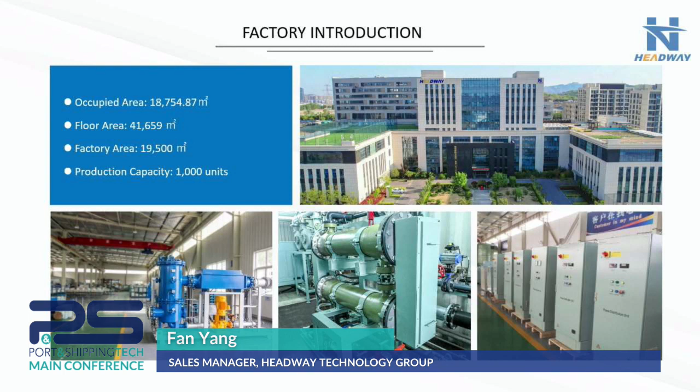Here is our company. Now we have over 400 employees, and our main product, as you know, is famous for the ballast water management system. Our production for this unit could be over 1,000 units per year.

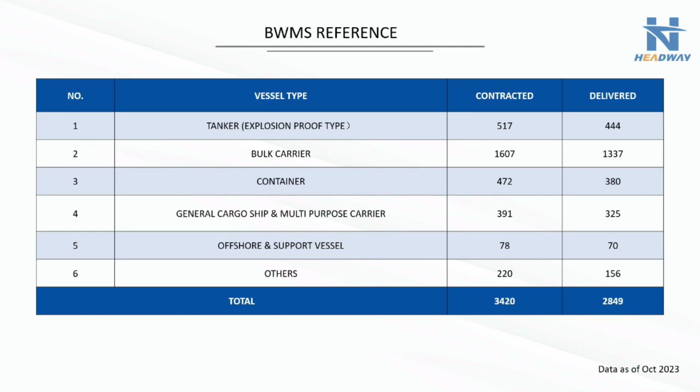So these are the references that we have right now. There are more than 3,400 vessels that have placed orders for our ballast water management system, and among them, 2,800 have been delivered.

Leveraging the big sales of our system, we have built a well-funded service network. Now we have 38 global stations, and also 3 spare parts warehouses, in Rotterdam, Netherlands, New Orleans, US, and also Singapore. So basically we can cover all the major ports that vessels will go to.

Next, I will show you what we are doing right now for the new fuel supply system. As you understand, starting from recent years, there are quite a few series of regulations coming out from the European Union and IMO. Like CII, it already started this year, and ship owners and managers have to monitor how much carbon emission there is for this year, and they will give you a debrief for next year.

Regarding the EU ETS, next year it will be started, and until 2026 they will charge for 100% of the carbon emission, like a carbon tax, let's say.

Also there is FuelEU, starting from 2025, and according to this regulation, based on the emissions of 2020, you have to reduce 14.5% of carbon until 2035, and 75% until 2050.

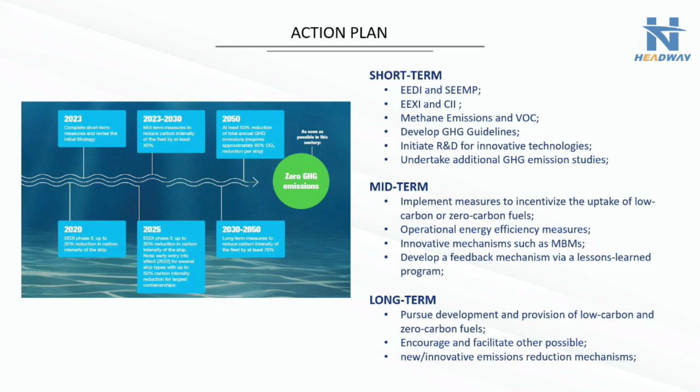From our side, as a maker dedicated to green technology, we started research and design for new fuel since 2017 for the LNG supply system, and starting from 2021 we started for the low flash point, which we call the methanol fuel supply system, and also ammonia is on the way.

For both our systems, we have already got the certificate, also some real orders, which I'll show you later. And why methanol?

Methanol is a clean, soluble, and biodegradable fuel. It will reduce almost all the SOx and 80% NOx, also 95% of PM, and approximately 15 to 20% of carbon emission.

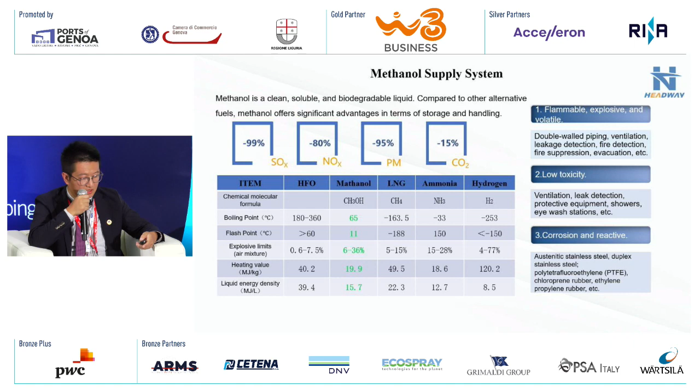Also, compared to LNG or ammonia, it's much easier for handling and storage on the vessel because it doesn't have high pressure and low temperature requirements. Moreover, it is easy to find, has plenty of supply, and the price is good, we see.

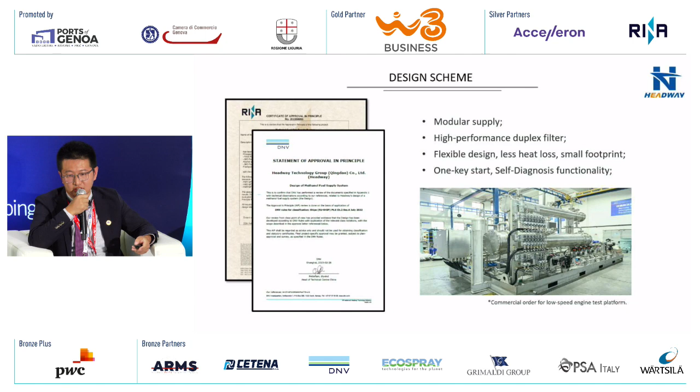This picture shows the prototype that we've been testing for half a year in our new experience center in Yantai. We have run it for half a year, and we have already got certificates from DNV and RINA.

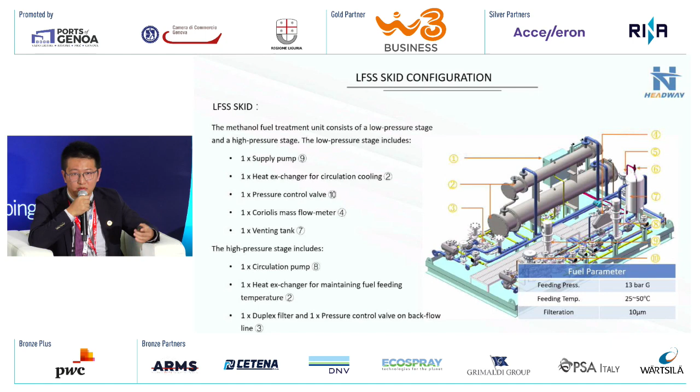This is the skid for the LFSS. With this skid, we are able to meet the requirement of the engine maker for methanol supply, which is 13 bars for the pressure, temperature 25 to 50 degrees, and the purity should be 10 micron. There are some major points here like the supply pump, circulation pump, and heat exchangers with water glycol, and also the duplex filter with one running and another as standby for backup.

And indeed, we already got the first commercial order in China for the methanol supply system. This one you are seeing right now is from the Dalian marine diesel engine. We will build this supply system for the MAN LGIM dual fuel engine for their testing in their platform, and this will be delivered by end of this year.

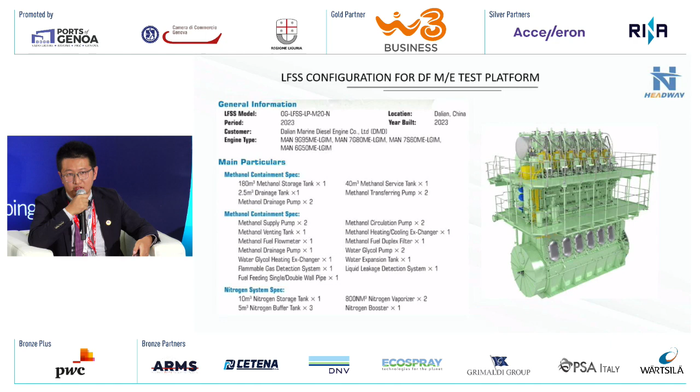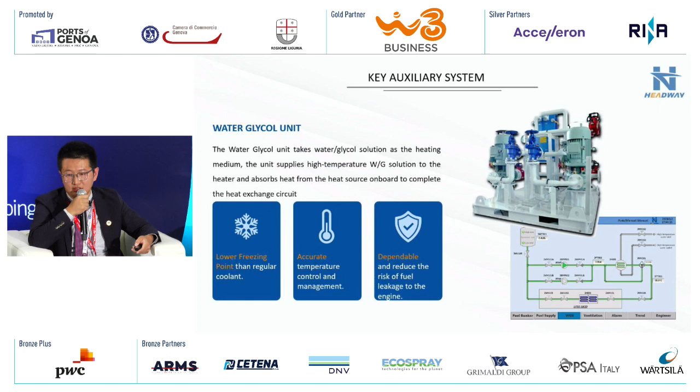Besides the main unit, the LFSS skid, we are also able to provide independently the water glycol unit for heat exchanger, and also the nitrogen generator on the vessel.

So as for the gas supply system, besides the methanol, we also provide another alternative, majorly for the LNG carriers - the LNG dual fuel vessels supply system. For Headway, we have developed the full scale of this system. We can provide a high pressure system, a low pressure system, and a self-built-up pressure system for all kinds of engine.

So the EGCS, we call it scrubber. It's a solution not for the carbon emission, but for the SOx. Basically, now for new building, it's necessary for the installation of scrubber to lower the SOx.

And from Headway's side, we are able to provide any kind of scrubber that is requested for a vessel. It's customized, tailor-made for the vessel - U-type, I-type, open loop, closed loop, and hybrid.

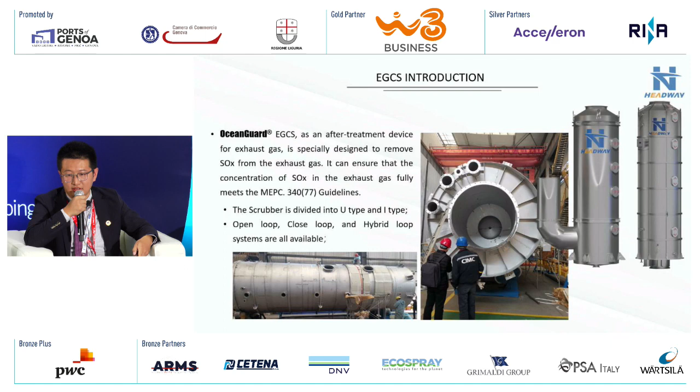And here is an example that we made - an installation for a ship owner in Hong Kong, OOCL. It was during the COVID time, and we made this installation within 10 days in a Taiwan shipyard. This one is specially designed with U-type, and it will save space for the containers.

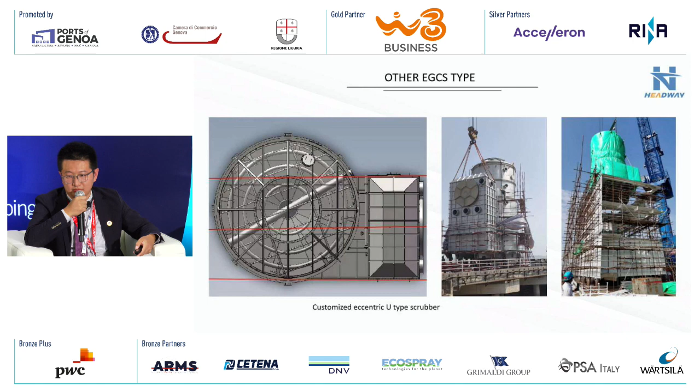Another system which is very hot right now is the carbon capture system. And this system is majorly for vessels with age of 10 years, 11 years, 12 years.

For Headway, our system is quite different. The philosophy of design is quite different from the traditional funnel with tower treatment. We use containerized design, and the installation will be much easier - only plug-in, connection, and commissioning.

For our system, we only take part of the exhaust gas from the funnel, which is 30%, and we treat it all with high efficiency. So there's no necessity to pass all the exhaust gas through the tower with low efficiency to treat only part of it. For our system, we use high rotation gravity with MEA to absorb and dissolve this carbon dioxide quickly. Finally, we put it into the tanks for liquidation and storage at minus 20 degrees and around 2.6 bars.

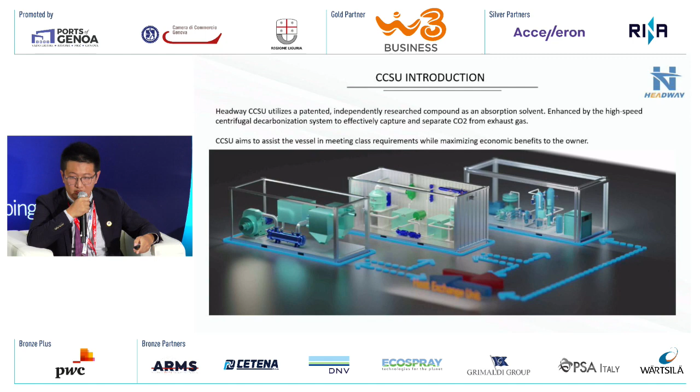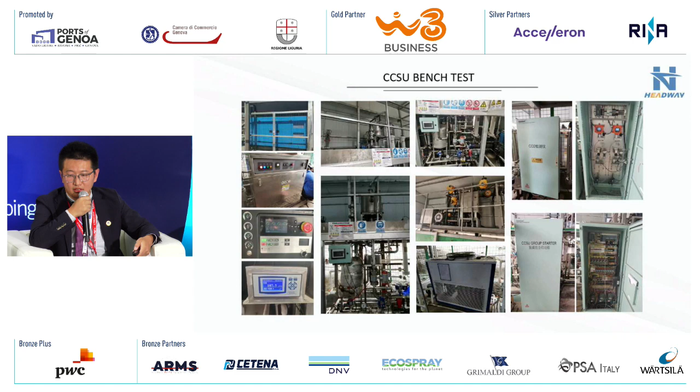So here is the bench test that we have been doing. And last month, we signed an agreement with Jiangnan Shipyard in China for a 99K gas carrier. This will be a joint project with the shipyard for the trial of the system, and at the end of next year this will be tested.

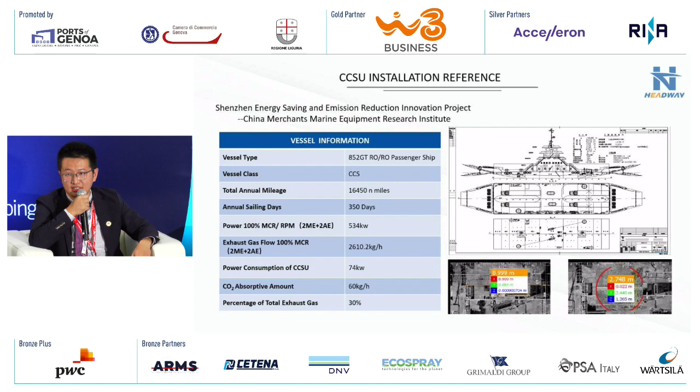Also, this one is an already installed project with Shenzhen Energy. It's a passenger vessel, and we've been testing it for about half a year.

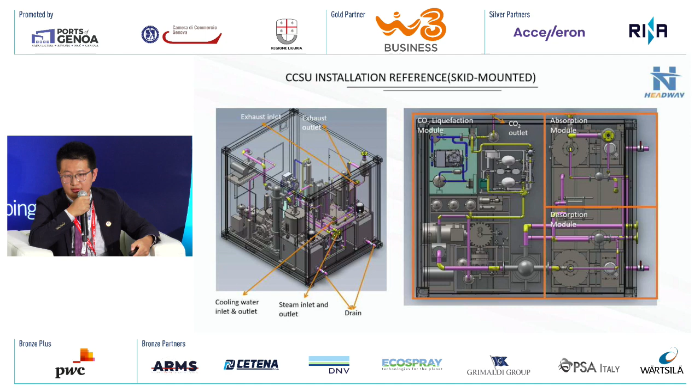Here's some layout of the system. You can clearly see that with this pipe connected to the funnel, we only take part of the exhaust gas out, and it goes into the treatment unit in the container. First, to cool it down and make filtration, to make it clean. Second, with the absorption and dissolving, and then it goes to the tank for storage.

And whenever the vessel reaches the shore, we can take the tank out and replace it with a new one.

So that's all for the presentation, for the sharing of the new technology, and thank you very much. Thank you so much.

Any questions for Mr. Fan Yang? No. Thank you so much.